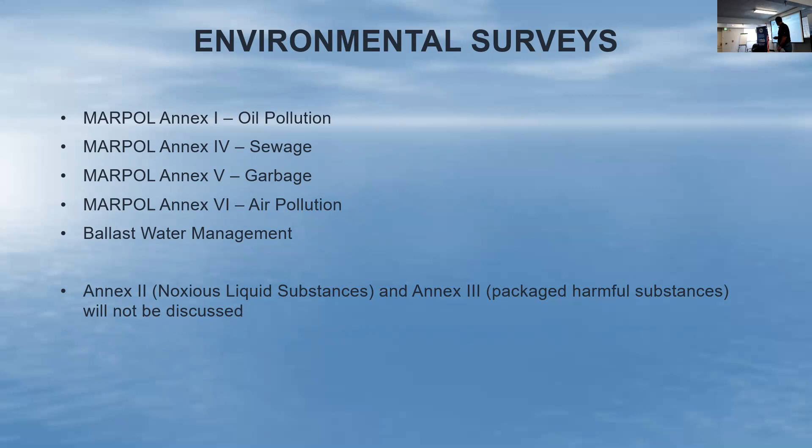So this is typically the process that I would recommend when you're doing an environmental survey. Start with your documentation, the certificates, because those SOLAS and those MARPOL certificates are correct, right?

Two years of audits, I had half a dozen certificates that had errors on them. I just finished a pre-purchase survey on a cruise ship. Certificates had problems on them, or at least areas of question.

But more importantly, there is critical information that you need to know when you start going down into the spaces and walking in the spaces so you can check it. So I always recommend start with the certificates, start with what the ship's procedures are. Unfortunately, we're calling this environmental surveys, but they're almost as much the A word that we all as surveyors hate.

They're almost audits if you're going to do a comprehensive job on it. Then I can get into either visual inspections or testing, vice versa. Depends again on the ship's operation, depending on what we're doing.

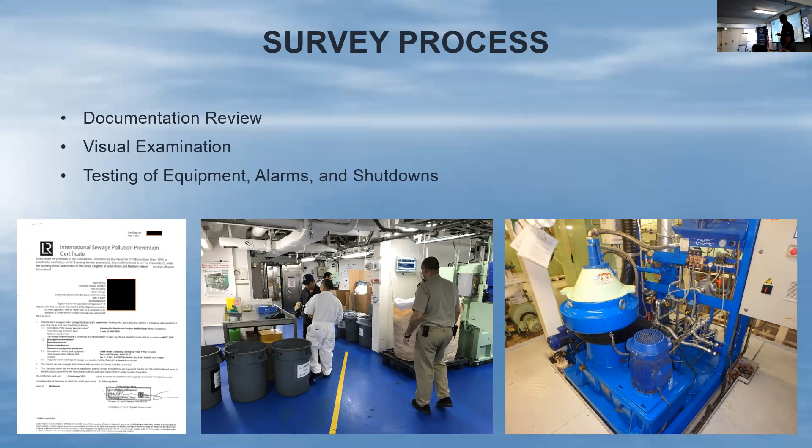So we'll start with Annex 1 with documentation on the oil. First off here, these are excerpts from some of the IOPP certificates. Most of these are Form A's that I've pulled off of passenger ships or general cargo ships. I didn't have any tankers that were readily available.

First section that's somewhat critical is what kind of equipment's installed for oily water separating. Make, model, manufacturer, all that information, because later on we're going to want to check that.

It's not uncommon, especially on some of the other systems, the other environmental systems, where equipment has been updated, upgraded, old models discarded, and new stuff put on in the certificates, because class, when they issue these certificates, it's coming out of their database. So if the surveyor didn't update their database when they did the commissioning of the new piece of equipment, it'll continue right through forever.

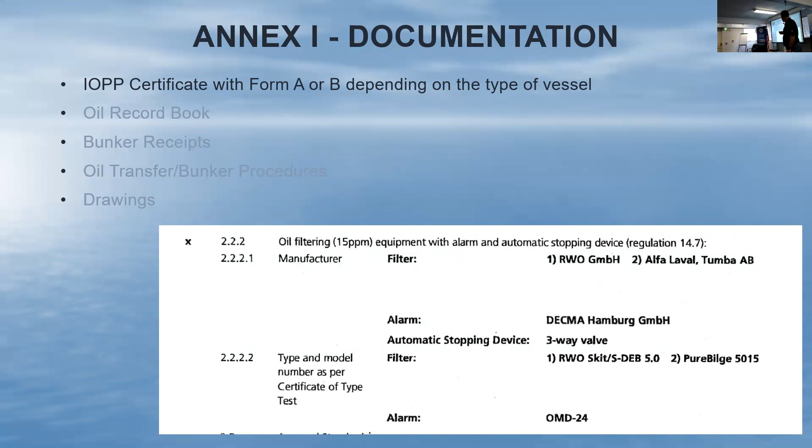Next piece is section 2.3, 2.33. What resolutions is your filtering and monitoring equipment approved under? At this point, any new installations are basically required under MARPOL, under resolution MEPC 107/49. Older equipment still serviceable and still in use can be retained on board. But again, if you start having problems with the equipment, you need to be able to go back to know which set of regulations are applicable to it.

And that's a point I didn't make initially, but again, that goes back to our planning. What set of regulations are applicable? Over 400 gross tons, MARPOL Annex 1 is applicable. Annex 5 is applicable to a larger population. So where and what's applicable?

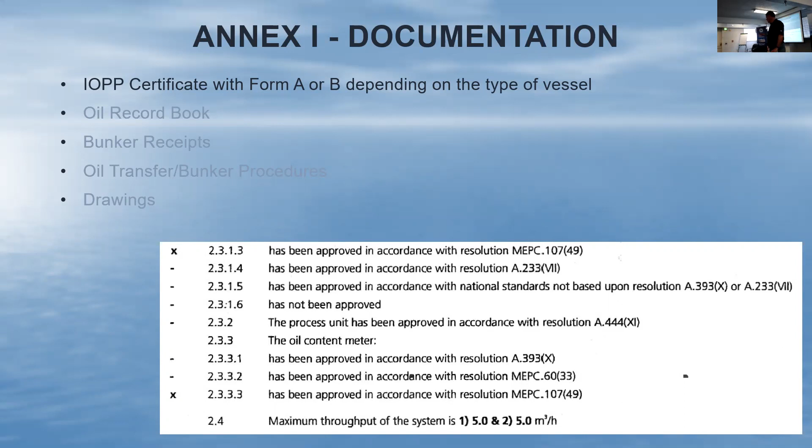Tanks, sludge tanks, capacities, and location. Now we're not obviously going to be climbing tanks and inspecting them, but again, as we start doing our survey and doing our walkthrough, and we'll talk a little bit more when we get into what's going on with the scrubbers and everything else, you start looking at modifications to the ship.

Tanks are being converted or being absorbed for other uses on board, and so they change it. The last thing that ever gets changed is the tank capacity drawing. That was developed and printed and stamped when the ship was delivered. And I can quite confidently say that probably 90% of them or more have never been updated since, and the ship's 30, 40, 50 years old.

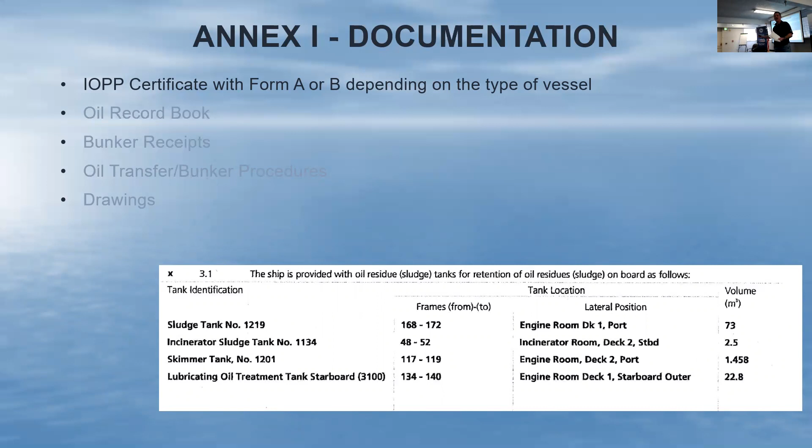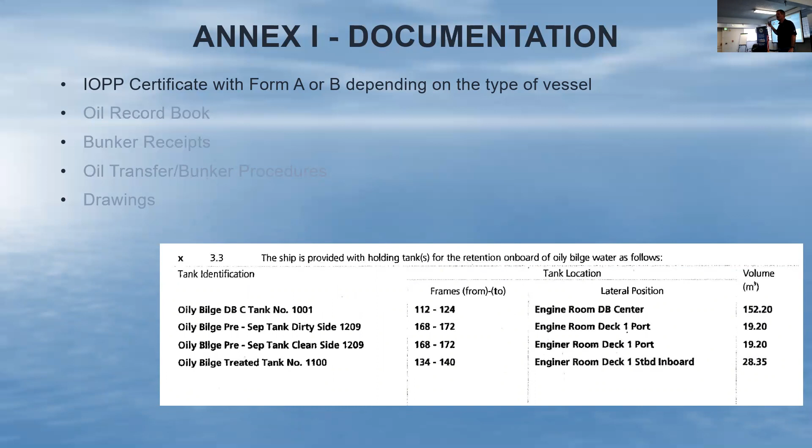And they've changed. Some are using ballast tanks now to hold gray water. They needed additional oily bilge capacity, so they've brought another tank and subdivided it, whatever. So drawings, here's our oily bilge system, our oily bilge tanks, and again, capacities, locations - good information to have when you're doing your survey.

And then the last part, right next to the signature block, is where the issuing authorities will put exemptions, notes, odd arrangements. This particular one here talks about a white box on the bilge discharge line. This goes back to a practice that the cruise line started during their first round of environmental crime cases in '98 through 2001, 2002.

And as part of their plea agreements at that point, in addition to the oil content meters that are mounted on the oily water separators, the overboard discharge line had a second sensor and a second oil content monitor put in at the discharge, right at the side shell. And so they create, or just before.

So they added a second container that was put in a caged enclosure, under lock and key that the chief engineer had, or the environmental officer in the case of cruise ships. That's the white box, because it's not the black box that aviation experts want to recover after an accident. So that's how that term came about. That's what you see there.

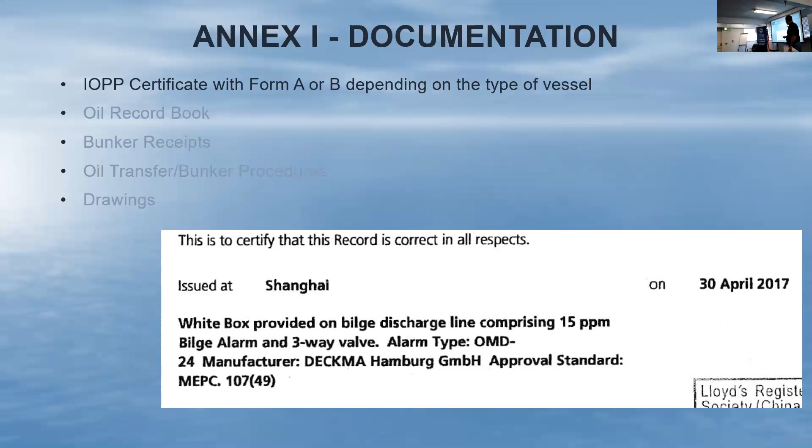Oil record books. How many people have looked at these? And how many captains hate them?

Signatures. If you go back and look at the environmental crimes cases in the US for oil pollution, every one of them, this is the culprit. This is what they cite - either obstruction of justice or false official statements. Because in all those cases there was an illegal discharge that was not recorded in the oil record book. The oil record book was presented to a government official, i.e. the Coast Guard inspector. Therefore you've made a false official statement and obstructed justice, because the Coast Guard could not observe or was not made aware of the illegal discharge.

So I don't go to jail. I know how to fill one of these things out, and I make sure the chief engineer I work with understands how to fill it out before he starts to discharge. He hates me for it until he understands the importance. Right, great.

There's a lot in the policies, and that's why you've got to be careful - it's an audit. For instance, on this particular ship, the ship was Italian registered. In Italy, the Italian government requires that all oil record book entries have one in English and one in Italian - the same entry has to be done twice. On top of that, they have a requirement that, and I think I've got a picture of it...

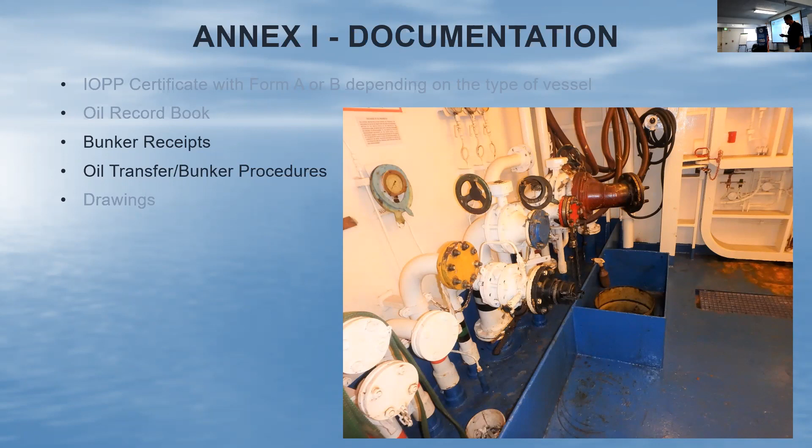And again, we talked about the drawings. So Annex 4, sewage. A couple things off of the certificates to look at: your equipment on board. Like I said, this can easily change on a ship that's 30 or 40 years old, where the old Hamworthy Trident marine sanitation devices that they put in 30 or 40 years ago, the tanks rotted out, the piping is all plugged up, and they can't get parts for the components. They're struggling to get chemicals, so they choose to upgrade it to reduce the footprint or whatever else, and they forget to change the certificate.

Another document they're required to have: there are times, especially on a ship that only has a single sewage plant, where you need to discharge black water directly overboard. And there's a minimum rate so that it will be diluted. They're not supposed to discharge raw sewage at less than 4 knots while in transit, yada, yada, yada. So they're supposed to have an approved maximum rate of discharge. At what volume can the pumps be turned on to discharge, or do they need to speed the ship up or slow it down? You're going to want to check that. If there's documentation that they're doing that, then we need to check the logs, see what kind of speeds they're doing.

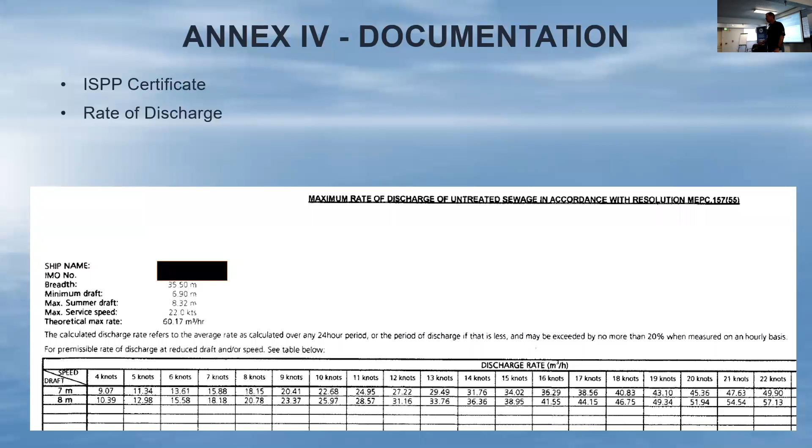Annex 5, garbage management. There are some very basic requirements, and those changed about 4 or 5 years ago when they eliminated things like dunnage. So it's basically down to comminuted foodstuffs, and that's about it that can be legally discharged nowadays. Ships over a certain size have to have an approved garbage management plan. So do they have one?

Garbage logs, again, spot check. When they enter that they're turning on the incinerator, they're supposed to log the latitude, longitude and time. Take the chart out: were they in that area? Are they in the proper area? Are they outside the ECA or whatever else? Are they doing it down in the Caribbean where we've got a wider special area where they can't do it? Garbage receipts is another problem area.

They talk about some. It comes and goes. Right now, as far as for garbage, I'm not hearing and seeing a lot. The big ones, the Baltic Sea, they just went in. The Baltic went into full effect because they finally determined that there were enough shoreside facilities that could receive garbage in the Baltic to enable them to start enforcing that.

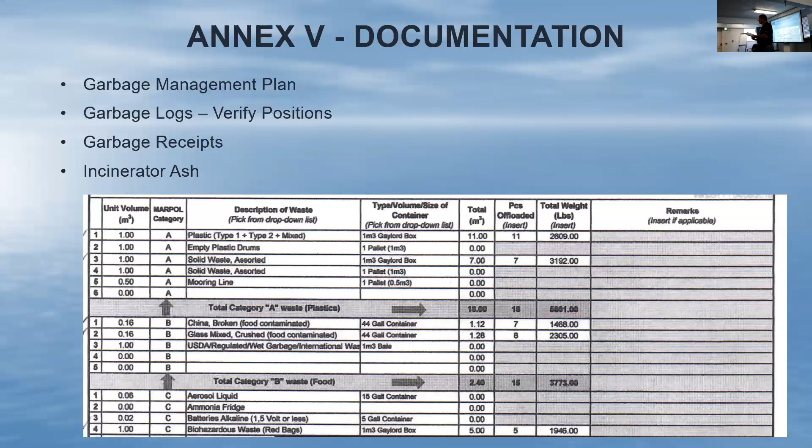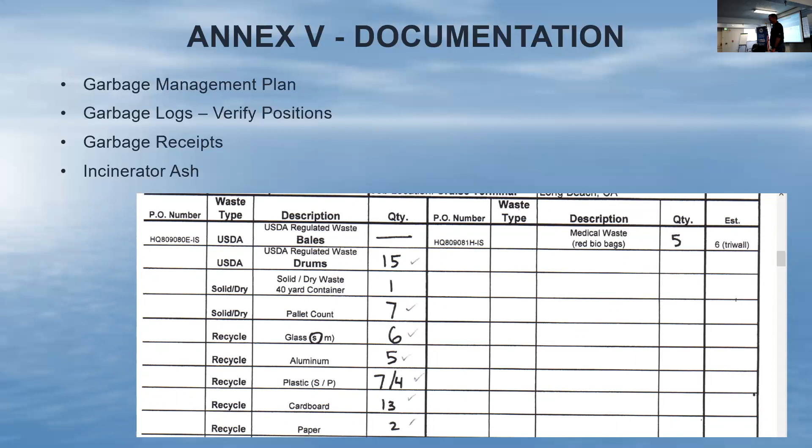So, here, it's a drum, a 40-yard container, a pallet, a small container of glass for recycling. What's a small container? It's supposed to be by cubic meters according to MARPOL. But if I've got five starter batteries, how many cubic meters is that? They're on a pallet. Do I include the pallet in the cubic meter, or is it just the batteries? Yeah. Right there. Matters to be addressed. Here, waste descriptions and handling guidelines, Appendix 1 of the garbage management plan. And so we talked about the incinerator ash.

Okay, Annex VI, there's basically 3 critical areas right now. First is ozone depleting substances, HCFCs. As of January 1st, ODS is verboten, basically. If the system's in service, it can remain in service, but the manufacture of ODS, i.e. R22, is no longer allowed. So as soon as they have a leak on the system, what are they going to do? So as a surveyor, as you can see here on this air pollution certificate, this ship had one AC compressor that was R22. So the question is, what's your plan to your client, to the ship owner? What are you doing? You gotta have a plan.

Now there are drop-in refrigerants that can go into an R22 system without having to clean everything and change it over because the oils are compatible and everything else. But what's your plan? So how are they managing it? They're required to do a monthly inventory of all refrigerants on board. That's another one that trips the chief engineer up on the cargo ships. How many cylinders of each refrigerant has to be logged.

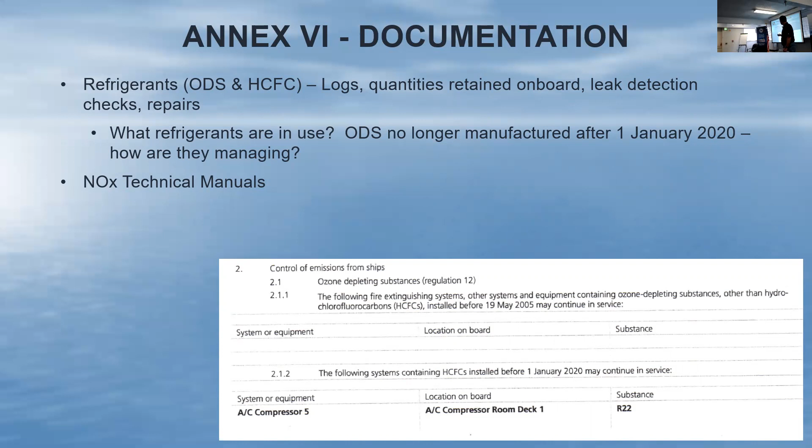NOx technical manuals. How many people have seen, for nitrogen oxides, what the technical manuals are? We all know that after 2000, you had to have Tier 1, then Tier 2, Tier 3 engines on new construction. And those vessels with Tier 1, Tier 2, Tier 3 engines have to have a NOx technical manual. And I'll rush through this so I can get to a couple other things real quick. There has to be one for each engine, and inside that manual is the approved parts list for every component that affects the NOx emissions of that engine.

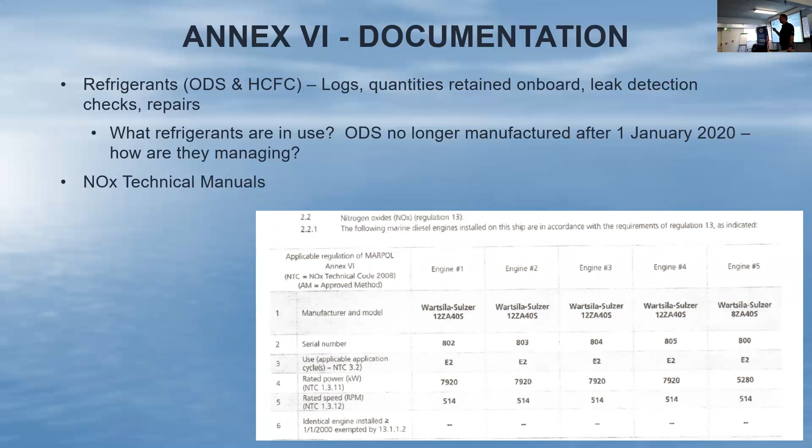So, all right, I'm getting the high sign. Scrubbers. You'll be able to read through this. For air pollution, for sulfur oxide, excuse me. So the inspection, what we want to do is just a general walkthrough, looking for leaks, because leaks are going to give you an indication on whether or not you can trust what you're seeing in the oil record book.

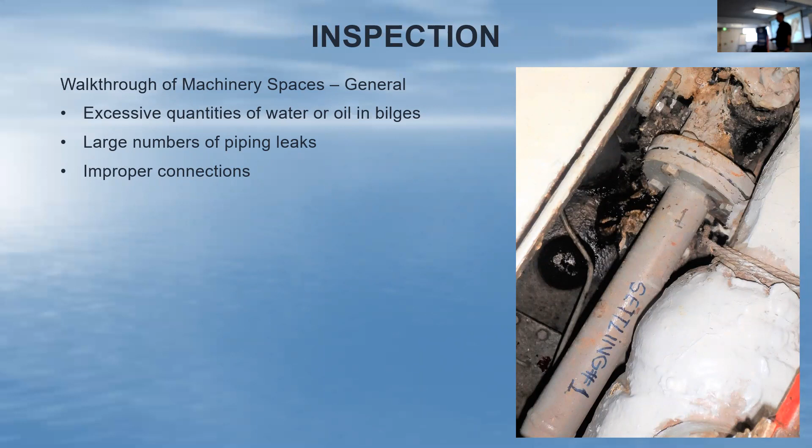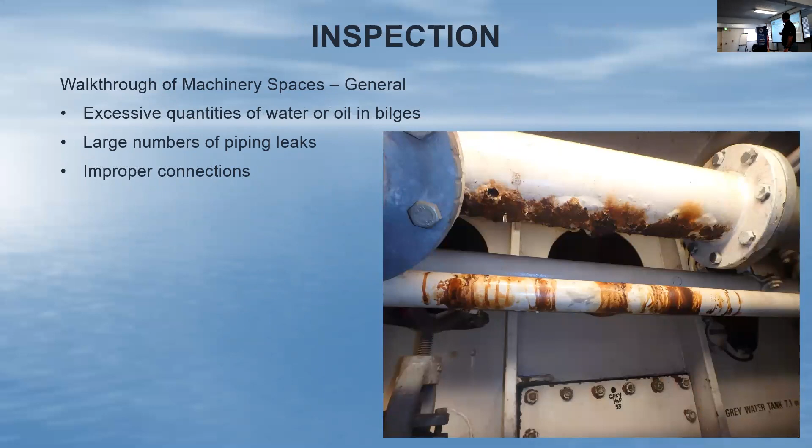Nice stalactite, huh? Yeah, we just, large number of pipe leaks, large number of oil leaks in the purifier rooms. Improper connections. This particular one was a ship that was arrested for the charter went bankrupt, and so it wasn't anything pollution related. But I was doing a pre-purchase survey on it,

and I found them. The ship, it was an expedition cruise ship, had a very small gray water tank, and they had been tied up at the dock for 60 days already. So they were using this to pump. They ran a fire hose into the gray water tank, and then were using the pumps to pump it into the ballast tanks.

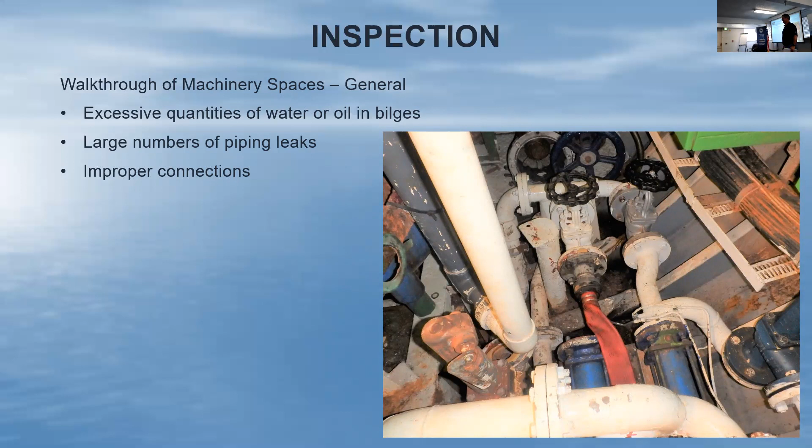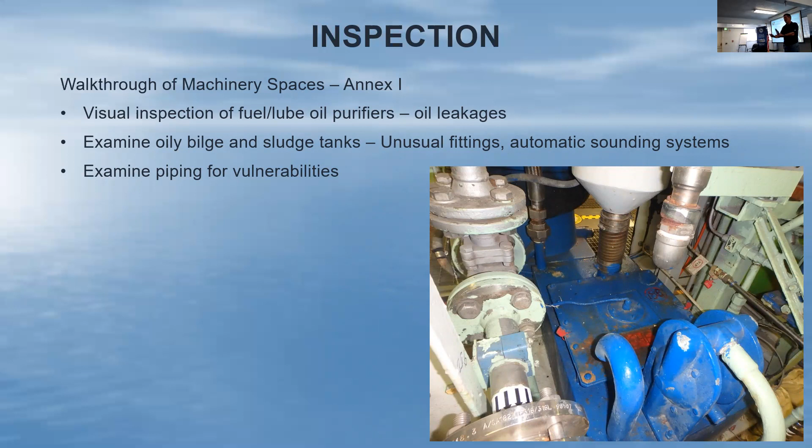So lube oil purifiers for leakages. This was a case where I had a fuel oil purifier that had a little air diaphragm chupa chupa pump built in that was transferring the sludge from a small less than 1 cubic meter tank.

Here's exactly what you're talking about, Bill. Gray water. This was a gray water system that I found. Right behind me where I was standing taking this picture was a watertight door, and the transfer pipe that went under there back to the aft part of the system. And there was a corresponding fitting right there that had this exactly the same.

And they would do that so they could cross connect, because there was no cross connection between the forward gray water and back. And again, that's what actually got Carnival in trouble. They had a gray water collecting tank that had a faulty overflow automatic float switch for pumping it down, would overflow into the bilges, and the crew got in the habit of taking the portable pumps, the chupa chupa pumps,

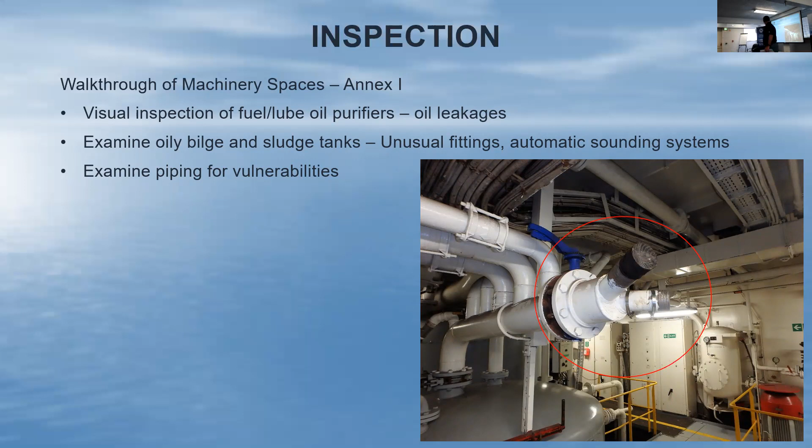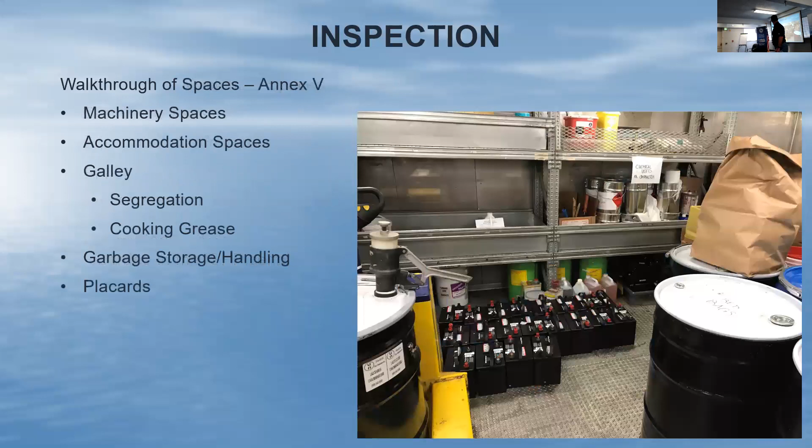and putting it back into the gray water system because it was gray water, forgetting it had touched the bilges. And then that became common practice for everything in the compartment, and then everything in the engine spaces. And it went on for 8 years. So let me see a couple quick other pictures, because I want to get to some critical ones. This was an interesting one.

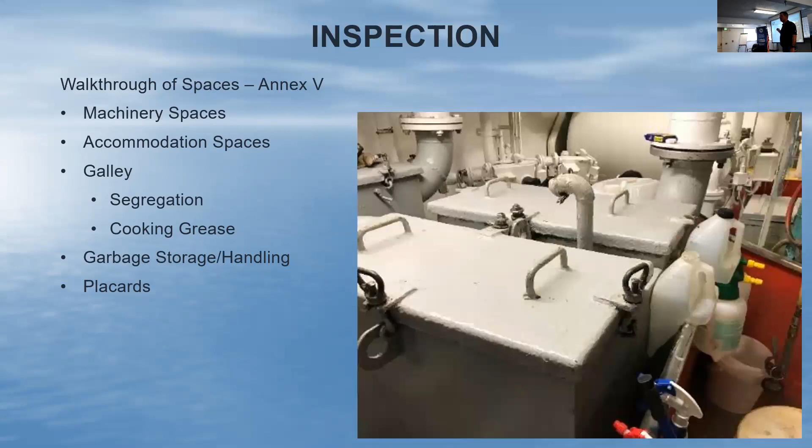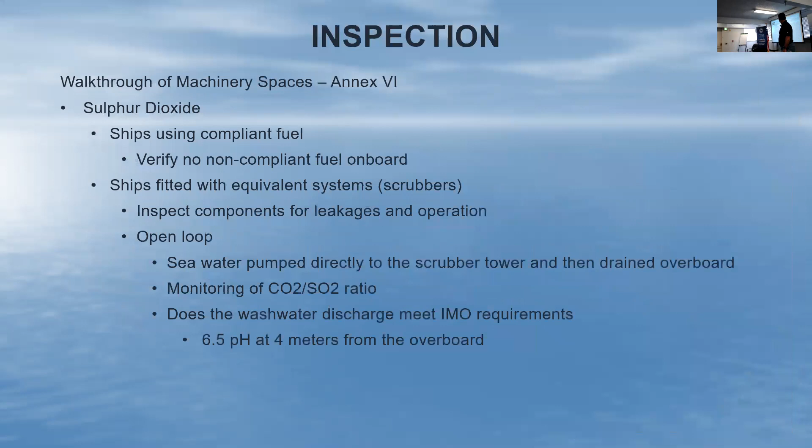and every week they would collect it, and then they would just have another lorry pull up and drive on, and they would just go, whoop, here you go. And that's how they did their garbage. Grease collecting tanks for food, for the cooking oil. So I want to get on the, those are some scrubber pictures, process tanks,

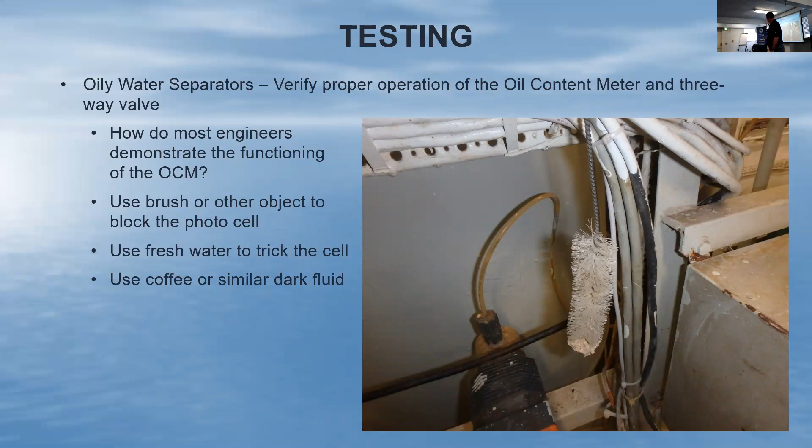ballast systems. So how many of you have seen that when you're testing an oily water separator? The little brush. What's that for? That's your photo cell for your oily water separator, for your oil content meter. And the crew will say, oh, you go down, you say, I want to see your 15 ppm alarm. All right, they take the cap off, they shove the brush down in it, blocks the entire photo cell.

Readings go to double E, which means that it is maxed out the system. Three-way valve closes, and away they go, and they say, oh, it works. Or they stick their finger down there, or they take a cup of coffee and pour the cup of coffee down there. All of these crazy things, they are not the proper way to test an oil content meter.

There's a couple of companies, Total Marine Solutions is one, but there's a few others that do annual certifications or 5-year certifications of the oil content meter, and they have a bottle of liquid that is 15 ppm that you can use to inject into this and test it. So get the ships to do that.

We've gotten lazy, and for years when I started in the Coast Guard, and I was one of them, I was lazy too, and I'd accept it. Oh, the alarm worked, great. Until you start realizing you have to put your name on the international certificate that says everything works.

And the reason I bring that up is we actually had a surveyor in Miami for Panama that was arrested and thrown in jail for 18 months for fraudulent certificates and fraudulent surveys. So the ethics stuff this morning can have real consequences down the road. He issued a certificate without testing the oily water separator, and was actually not on board the ship when the certificate was issued. So, all right, thank you.